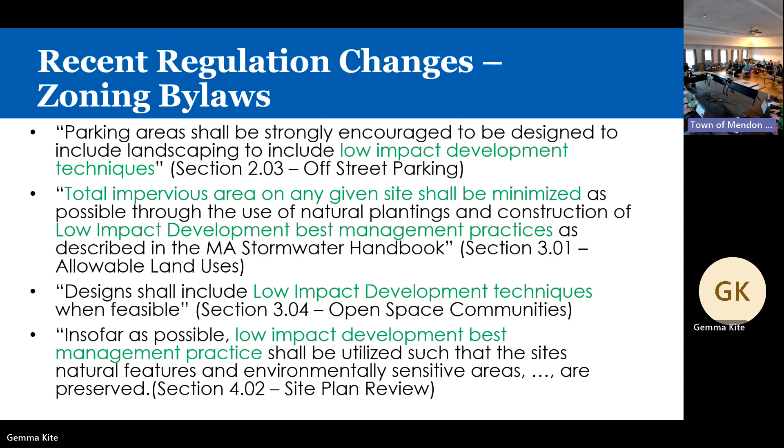But we also felt like people weren't using them enough. Change is difficult, and people like to do things the way they've always done it. So we thought that maybe a demonstration project would help.

So this is what this campus originally looked like. And around 2020, we built a new police station and adaptively reused the old fire station, and it was a great project and looked wonderful.

But the rest of it was just asphalt and parking. It was very hot in the summertime, had a heat island effect, and it did not drain well. Chemicals collected from the road and washed down into the parking lot, and the town well is right under the parking lot, which is not so great. We're going to move it to the edge, but clean water is really important for wells and drinking water, in Mendon and probably your towns too.

Anyways, we figured this would be a good area to show low impact development techniques. It was dug up anyways, and we wanted to do something, but we definitely needed experts—we did not know how to design a site like that. So we applied twice to MVP to get a grant, and we actually got funding from SNEP, the Southeast New England Program, which gave us money so we could pay Horsley Witten to do the technical aspects of the grant, and that was super helpful.

So the second time we got the grant to design the site, and then the town paid for the construction. An aspect of this project had to be educational, so there will be signs, and people can do a self-tour to learn about GSI and low impact development. There's also a website, if you haven't visited it, that has a lot of explanations on the site.

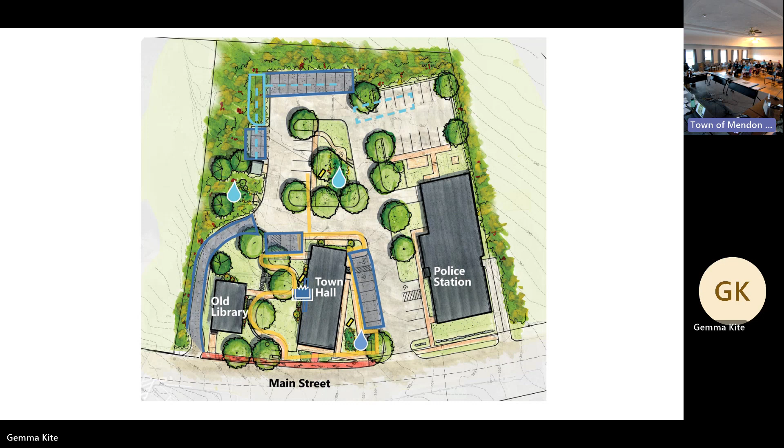And as Mike Maroli mentioned, we had a team that worked on it, meeting every two weeks, sometimes once a week, and the collaboration was really great. The fire chief would tell us if his equipment could get in and turn around, if the angles were right. The police chief made sure the traffic flow worked for having the police station here. Kathy from the Historic Commission made sure we were sensitive to the historical aspects of the site. So it was a real team effort.

And then—Hillary, do you want to say a little bit about MVP? Let's see. It's not answering—yeah, it won't go. There we go. Sure.

So the MVP program started back in 2016 under Governor Baker. Governor Baker's administration put together this plan to help our municipalities consider the impacts of climate change. We're seeing hotter days and longer, more intense periods of rain, and funding was put in place to help start the conversation with our planning grants, and to provide action grants so that the discussions and actions municipalities came up with could be funded through further grants.

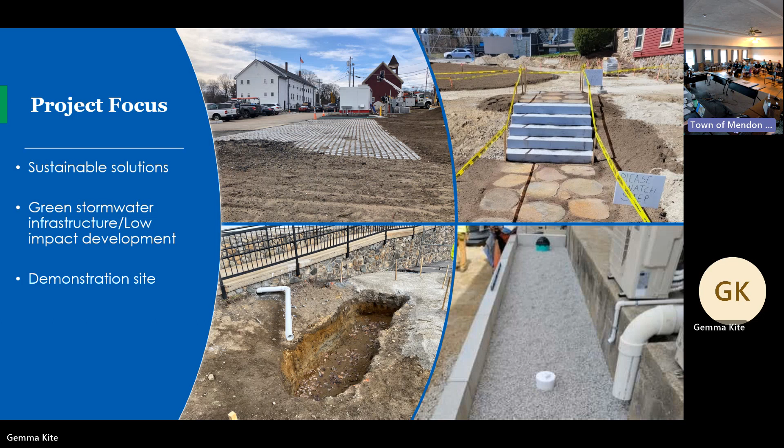Again, super informal here. So I'm going to talk about what GSI is, give an overview of it, and then I'm going to hand over to my colleague, Eliza, who's going to talk us through what GSI practices we used here at the Mendon Town Hall.

So let's start from the beginning. What is stormwater? I'm sure most of you know what this is, but as a recap, it's precipitation flowing over the ground and not soaking into it. In more natural areas, including our forests and our wetlands, stormwater can soak into the ground. That's what it's supposed to do.

In urban and more developed areas where we've got a lot of impervious surfaces, things like streets, driveways, sidewalks, building roofs, stormwater can't penetrate through these hard surfaces. So instead, it flows over our roads, it flows over our driveways, it picks up things like sediment, bacteria, pollutants, and sometimes it gets put into infrastructure, and then it gets discharged at another point, usually into our waters, into a stream, into our river, into our oceans.

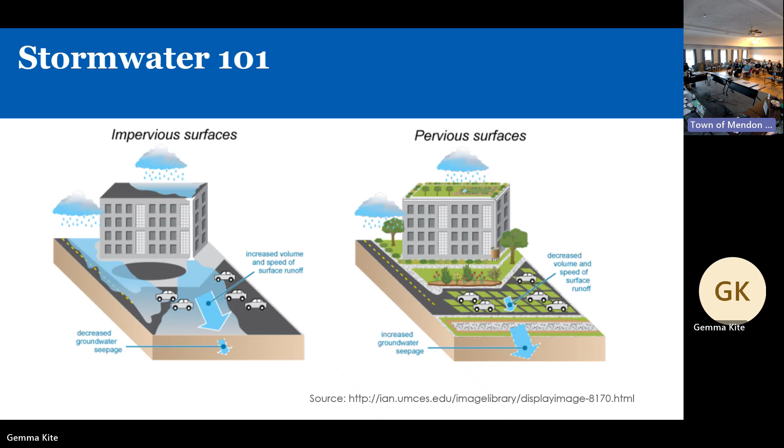So impervious surfaces, as this diagram might be a little hard to see, not only increase the amount of runoff that is coming off, but also increase the speed at which that stormwater flows. So urbanization affects the way water moves through our landscape. The more a watershed is developed, the more impervious surface we add to it, the more we are changing the way the watershed can manage the stormwater.

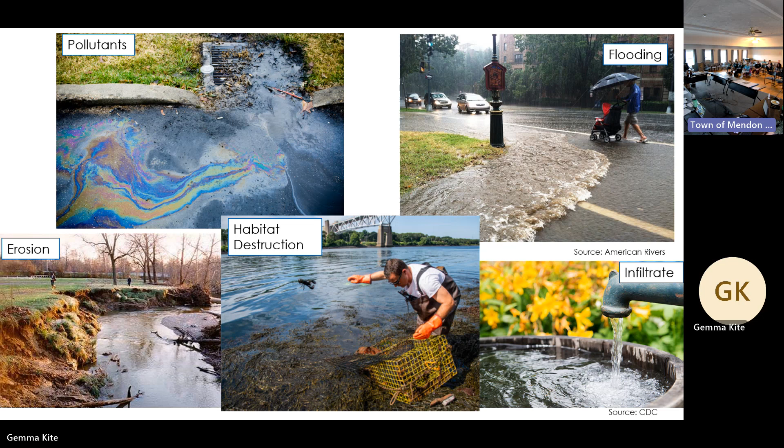And the result of this is things like increased pollutants to our waterways, an increase in the severity and frequency of flooding events, increase in erosion of our waterways and sometimes even our infrastructure on the roads, the displacement and destruction of habitat for fish and aquatic species. And less infiltration into the ground means we have a decreased amount of base flow for our streams. It also means less water is going into our aquifers that we use for drinking water sources.

So when you look at those, you might think, oh, these are all kind of not connected, they're seemingly isolated. But when you look at this on a watershed level scale, it can really cause and create havoc, and it can create impairments in our waters.

So Mendon is situated in the Blackstone River watershed. I'm sure most of you know that. Neighboring communities are also in this watershed. There is a tiny bit of Mendon that's in the Charles River watershed, so I don't want to ignore that, but the majority of Mendon is in the Blackstone River watershed. And in the draft Massachusetts 303D list, which lists our impaired waters as assessed by the state of Massachusetts, it has listed segments of Blackstone River as impaired for a variety of pollutants, including some of the headwater streams to the Blackstone River. So this is a real issue for Mendon and for the neighboring communities.

Stormwater is a tangible impact to our waters. We can manage it. We can manage it better at its source to help improve the water quality of our waters.

So how do we manage it? Traditionally, on the left, stormwater has been thought of as a waste product, something to quickly capture, get it off our roads, move it, transfer it somewhere else, and discharge it elsewhere. We use gray infrastructure, pipes, tunnels, catch basins, gutters, to capture this stormwater, move it, and discharge it. Well, there's been an evolution or revolution, however you'd like to call it, over the last few decades where we're seeing less gray infrastructure and moving to green infrastructure, which we call green stormwater infrastructure, GSI. GSI mimics natural processes, natural systems, to treat, filter, and infiltrate the stormwater at its source or as close to its source as possible.

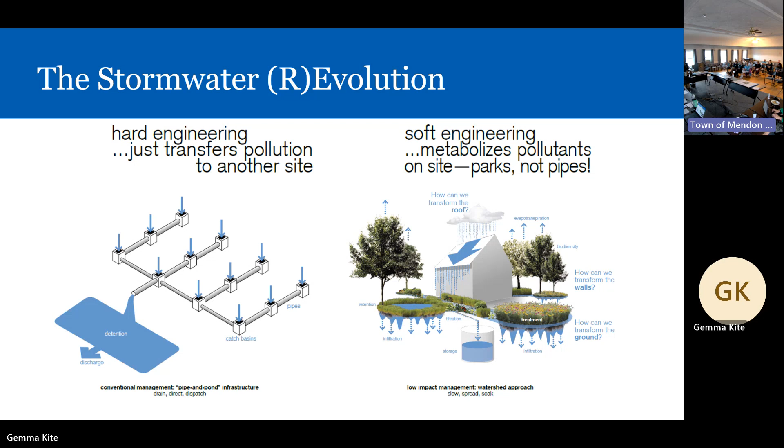I like this schematic, but I also really like the definition of GSI, pulled from the 2019 Water Infrastructure Improvement Act that Congress passed. It defines GSI as the range of measures that use plant or soil systems, permeable pavement or other permeable surfaces or substrates, stormwater harvest and reuse, or landscaping to store, infiltrate, or evapotranspirate stormwater and reduce flows to our sewer systems and or to surface waters. So it's a range of measures we can use collectively to help treat and infiltrate our water.

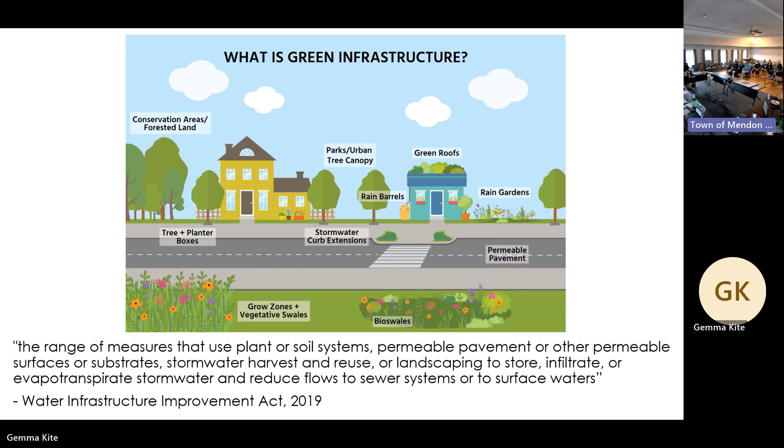This schematic shows a bit of a difference between our traditional gray infrastructure and green infrastructure. If you look at the left, the one thing we definitely want to do when designing stormwater control measures is slow the water down. Impervious surfaces increase that speed of flow, and we want to slow it down because that's what's causing erosion. So flow control is really important.

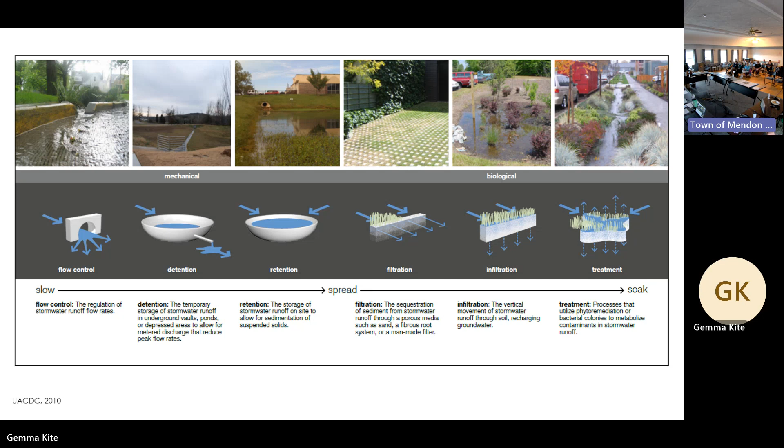We also want to spread it out. We want to detain it, again, to reduce our peak flows. On the left you've got more of the mechanical components of stormwater design and management, and as you move to the right we're getting more to the green aspects. Now GSI still includes those mechanical components, so we still include flow control, we're still detaining and retaining water. But with GSI, we're also adding that soak component, so we're using filtration, treatment, and infiltration.

So as a recap, the principles of GSI are to mimic nature, mimicking natural processes we see all around us. We're percolating water through the ground where sediment and bacteria can get trapped. We're using plant root systems to help uptake nutrients, and we're moving water through the ground and through transpiration of our plants.

We treat it as a resource. That's the biggest overall lesson here - whereas gray infrastructure treats it as a waste product, something to get rid of, we're looking at it as a resource. We want to infiltrate that water as much as possible to recharge our aquifers that we depend on for drinking water, and to recharge our stream base flows.

We can use GSI to capture water on site and store it - sometimes using a rainwater harvesting system where we capture it off the roof, store it in a cistern, and reuse that water later during dry periods to help irrigate the landscape on our sites. We'll get into some of the co-benefits, but the great thing about GSI is there's a lot of other benefits besides just stormwater management. And the last point here is it promotes healthier spaces for people, plants, and animals. I don't think anyone can argue with that.

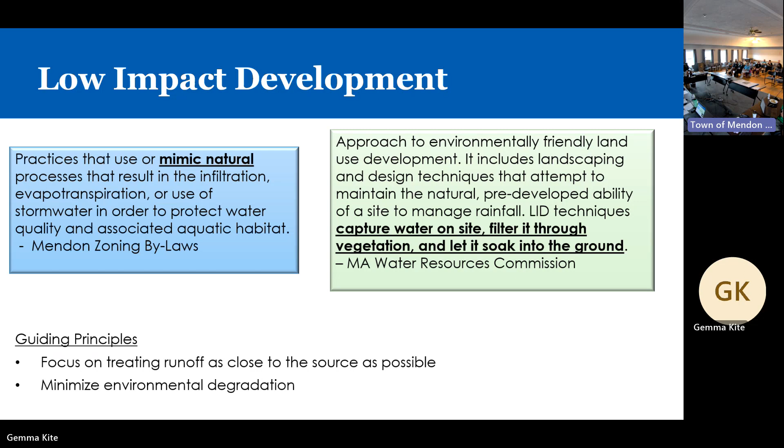So this is just to show that there are many different terms used for GSI. You might have heard not only green stormwater infrastructure, nature-based solutions, low impact development is another term used to define the same principle. In this case, Town of Mendon selected low impact development as the term to include in their bylaws. I just wanted to highlight that it's basically the same thing. In Mendon zoning bylaws, they define low impact development as practices that use or mimic natural processes. So again, talking about the same thing here.

So let's get into those benefits. A couple slides ago, I mentioned there's a lot of great co-benefits of doing GSI. We've already talked a little bit about the water quality, so I'll move past that and talk about energy. Less pavement means less heat. One of the principles of GSI is taking away as much impervious cover as possible, replacing it with things like landscaping or porous surfaces, pervious pavement and pervious pavers. Hard surfaces, impervious cover tends to trap and store heat so that it feels a lot hotter than it actually is.

By replacing some of that impervious cover with landscaped areas, we can really reduce that heat island effect. And if we're planting trees, not only do those trees provide shade for people and animals underneath them, but also if you plant them near a building, it also helps to shade the building. So less heat trapped in and around the building obviously means less energy costs to cool that building during the summertime. And of course, more plants mean better air quality. Plants do help clean the air, so that's always a good thing as well.

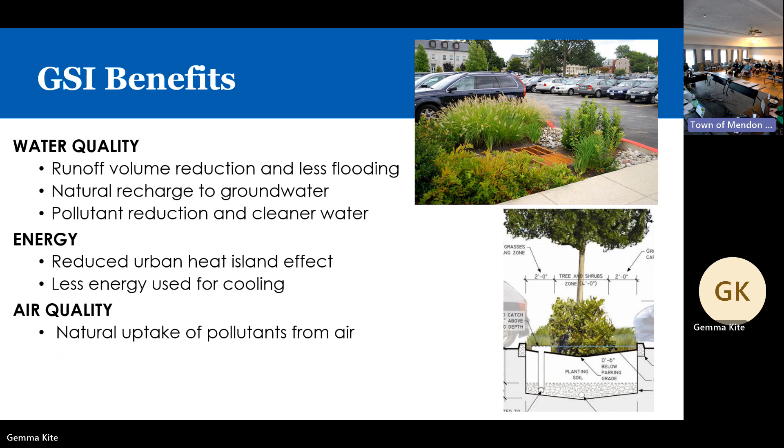One of my favorite benefits to talk about is community and habitat. Again, GSI, we think green, we think plants. And if you plant them correctly, which we always try to encourage plantings of native plants and mixing in some pollinators, you're going to attract the bugs, the bees, the butterflies, the birds. You're going to really create a nice habitat for those critters to come to. And if you disperse GSI throughout the urban landscape, you're also creating a habitat corridor for those bugs and critters to go between.

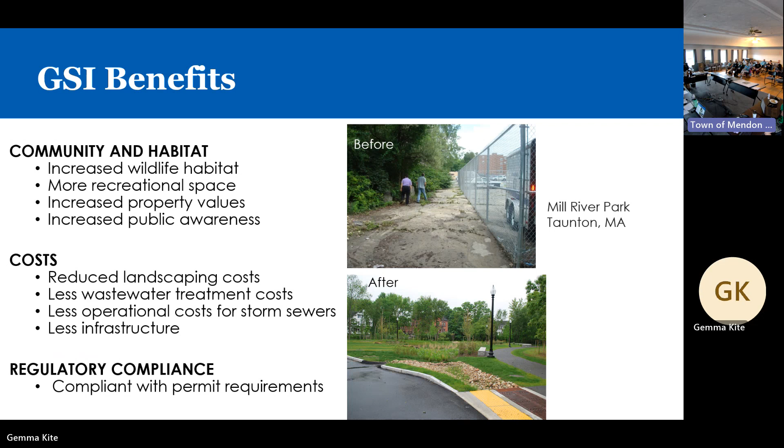For community, when you insert more GSI and landscaped areas, it's more open space for folks to recreate. And when people see more green space, they're more encouraged to get outside and be active and connect with other people in the outdoors. And being outdoors is not only good for our mental health, but our physical health as well.

And resilience. GSI practices are resilient to a changing climate. So where you have gray infrastructure, you have fixed pipes, you have fixed catch basins, right? When you design a gray infrastructure system, you design it so the pipe starts at this invert elevation and it ends at this one, and that's fixed. Sometimes it's even fixed in concrete.

With green infrastructure, it can adapt. These are intended to be able to be a little bit more flexible with a changing climate. And sometimes we design GSI to assist with a changing climate. For example, we have a site in Harwich where we are helping to redesign a boat ramp parking lot. And the parking lot is a very low-lying gravel parking area that is just prone to inundation from the tide and some high tide flooding events.

So what we're going to add to the design for the parking spaces is these pervious pavers that are going to add some structure to the parking area. So when there are those high tidal events, when there is that flooding, it can be a little bit more stabilized.

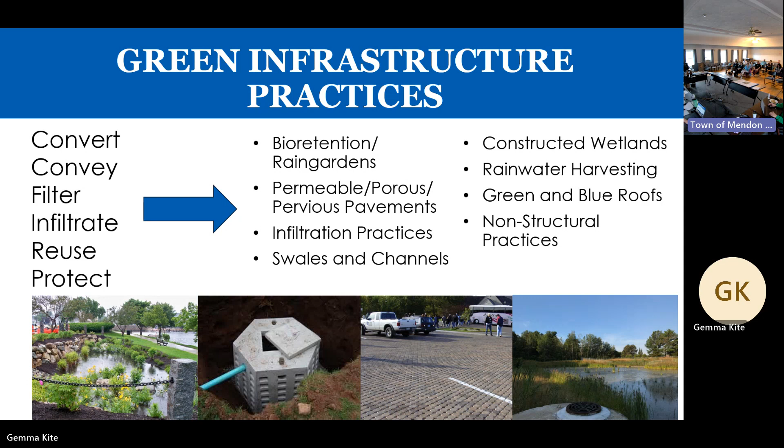I'm going to talk about what we did specifically at this site. If anybody has questions, please stop and ask them. We'll also talk about them outside, but if anything's unclear, do stop and ask me, because I've spent a lot of time with this, but it's not as familiar maybe to all of you.

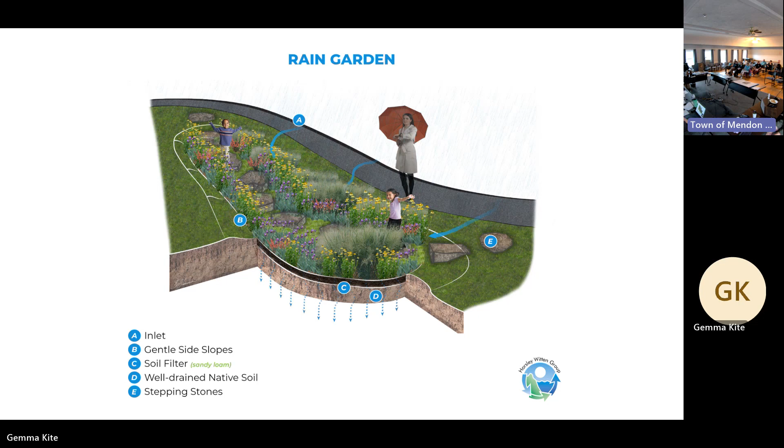So during a storm, this fills up. If there's more water than it can handle, it will overflow across the surface. And then after the storm, it infiltrates, soaks into the ground. So this is pretty straightforward. These can be done at very small scales, like individual homes. That's often something people like to do. So that's the starting point of these filtration systems.

If you're in a more urban site or you don't have as much space, you may need to put what we call hard edge bioretention, which has curbs or other walls. It just gives you a little more space without having to grade out a slope. You get more volume and less square footage.

The water goes into a sediment forebay area, which allows the sediment and other materials, leaves, trash, etc., to drop out. That's really important because, as we'll talk about with maintenance, this allows for easier maintenance. You don't end up with things in your plants that you have to pick through. It's all just concentrated in one spot, so in theory, it's just a shovel, and you can take things out easily at the one point.

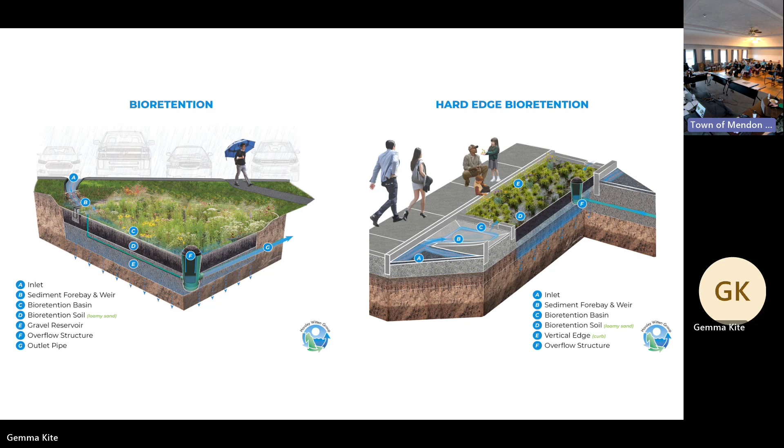And there's also, this is optional, and we have some of the bios on this site have it, and some of them don't, but we have an under drain pipe here, which can allow for additional water to get out of the system if you have bad soils underneath, or if, for some other reason, like you have a drinking water well like we do here, you can't infiltrate under the system, you can put in a pipe to convey the water out of the system.

So then, this is kind of unique to this site. This is something we don't often use, but this site was a great opportunity to use it. It's basically a hard edge bioretention, but in a smaller area, in a planter box. It functions the same way. You have an inlet, and in this case, often for these planter boxes, it's a downspout or something similar.

And you've got similar plants. You have filtration soil, you have filtration stone. The one big difference about this system is that it doesn't have a sediment forebay, because the water's coming from a roof or another surface that isn't generating as much sediment or pollutants. Also, it has an overflow, you'll see this all outside. It's the same principles, just a slightly different configuration.

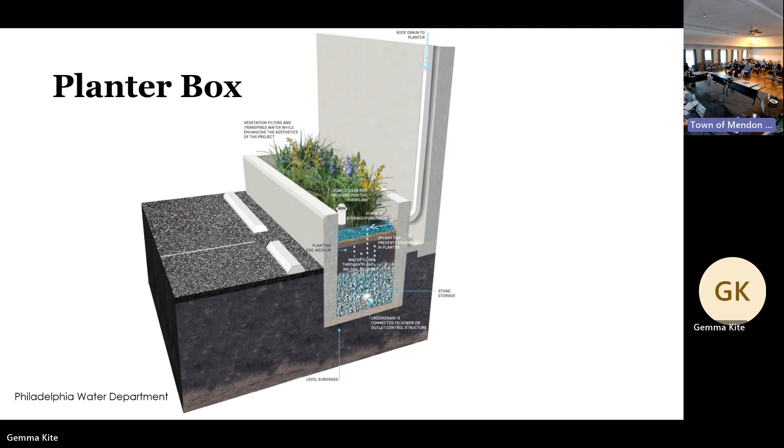So why would you use this type of practice? The really great thing is you don't have to compromise anything on your site in terms of site function or use. You need to have a parking lot, you can still have a parking lot. You need to have sidewalks, you can still have sidewalks. But the benefit of it is that it infiltrates water, so you can reduce the amount of runoff coming off the site. It can't take everything from every storm. In larger storms, there will still be runoff, so often we combine a pervious pavement with something like a bioretention area or other stormwater practices.

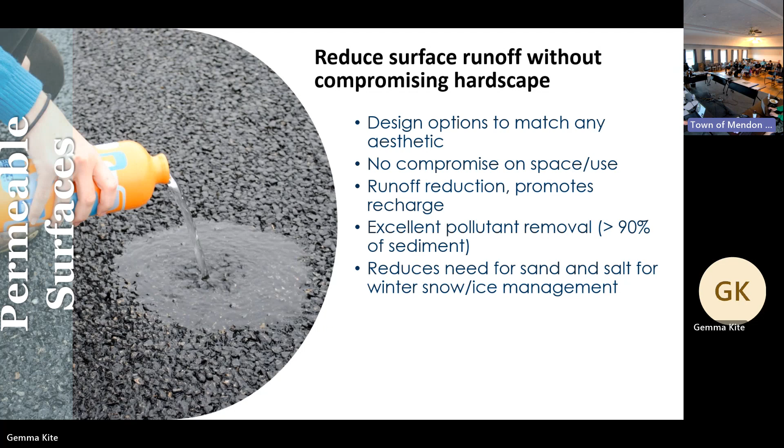There are a number of different types of materials that you can use. There's pavement and concrete that look very similar to typical pavement concrete, and then there are lots of paver systems, different proprietary materials, so you can find one that fits the use and the aesthetics of your site. They all work in the same manner. They have a layer that allows water to infiltrate, and then various sand and stone layers underneath that filter. Again, you can put in an under drain, you don't have to, it depends on the site.

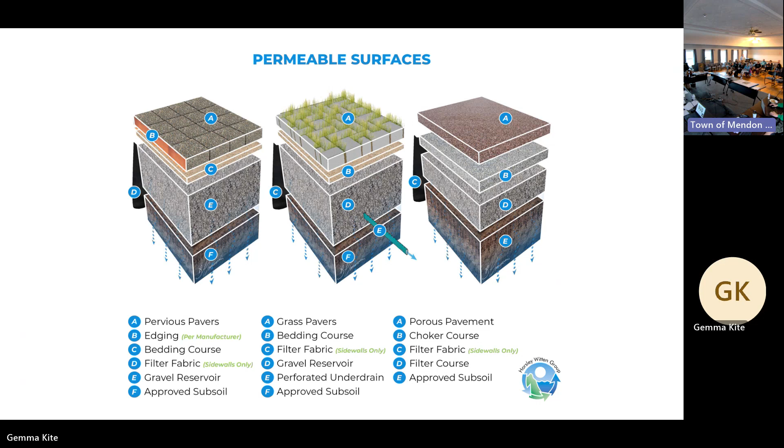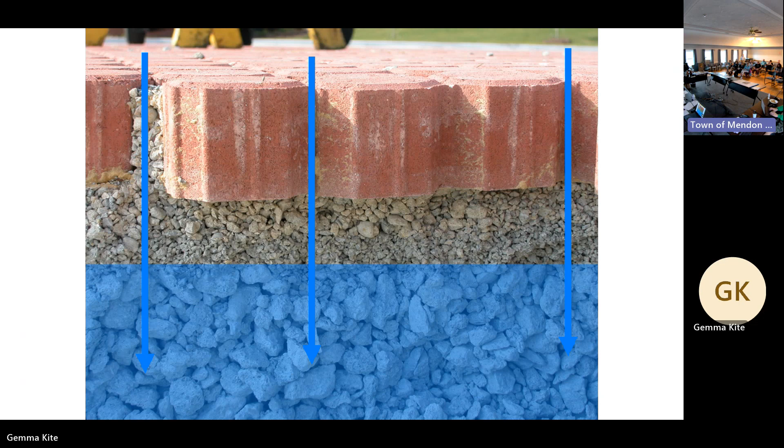So the function is pretty basic. It infiltrates, it fills up, and then it outlets. You do need an outlet somewhere in the site.

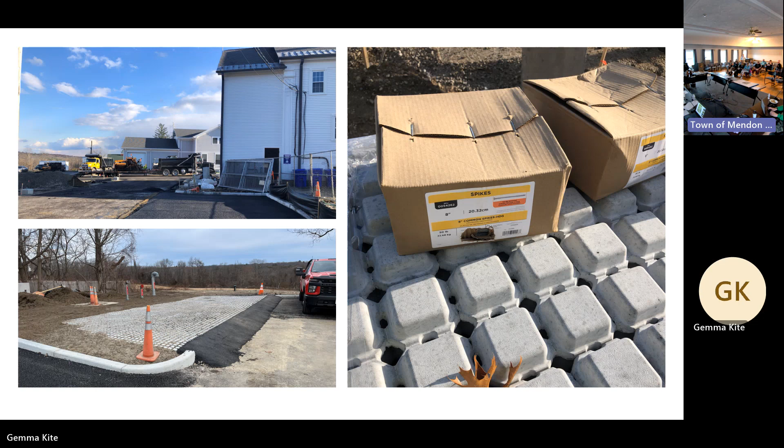And then the last thing I wanted to talk about was kind of a sneaky third green infrastructure practice that often gets forgotten because it's not as cool looking, and people may not even realize it unless you are the one designing the site. But removing pavement can be a really effective tool.

So this can be a really good tool, and this is something that we would encourage you to encourage - just seeing if you can add more green space to the site, get it more organized. You don't need a big parking lot if it's not being used, that kind of thing. So yeah, those are the practices we used on this site.

Yeah, go ahead, I just had a question. Was the decision not to make the entire site pervious where there's pavement cost-related?

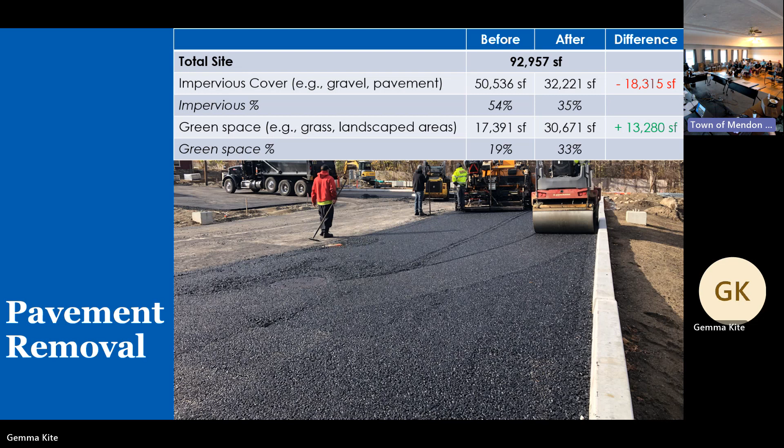So pervious pavement, it's not wearing exactly, but we often like to keep the drive aisles where there's more traffic impervious, because they will get clogged. If these drive aisles would get clogged sooner, so by just having the parking spaces pervious, it will last longer.

I don't know if cost factored into that, but usually having the parking spaces themselves pervious is a little easier than having the entire site pervious.

What is the project cost for this, and then the time from concept to actual implementation of all these different measures? You almost got the cost information.

Yes, and the timeline too. It's a quick timeline. So the construction cost was about just under 800K. And then the planning level costs were just over $100,000 to design, from planning, permitting, design phase, all of that, to preparing the bid package and going out to bid.

The town went through the MVP process in 2018. And in 2019, we wrote the action grant for the design phase. And then construction started in August of 2022. How much of that was covered by an MVP grant?

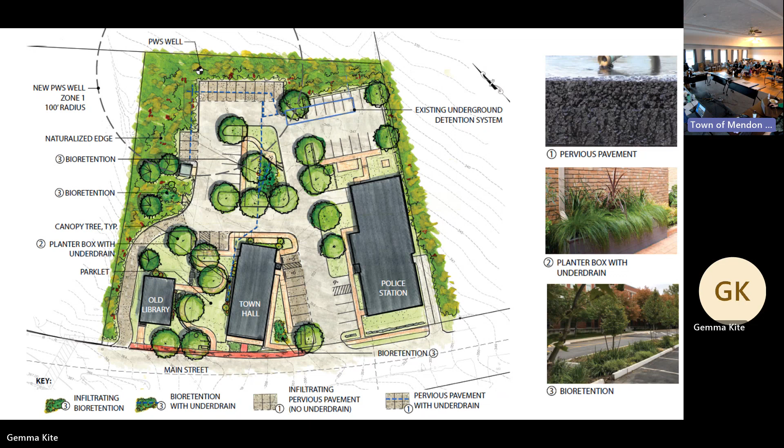Go ahead. I mean, the MVP grant does also - construction costs are also eligible for MVP funding. There is a 25% match requirement, which can be done with in-kind work from municipality, volunteers, community members, or cost match. It can be matching federal funds, local funds, private funds, anything but state funds.

Go ahead. How does that construction cost compare to a traditional non-GI approach?

Depends. In this case, it may have been more expensive. We were trying to do more of a demonstration project, and we had some grant funding. It can be less expensive. Porous or permeable pavement is the same as regular pavement, but you typically put a bigger subbase on it to store the water, so that adds cost. But if you eliminate something else, then it's kind of a wash. So it kind of depends really on the constraints. And it's a great segue.

Let me talk about a couple things. Again, my name is Rich Claytor, Principal at Horsley Witten Group. I'm just going to have a couple of slides on whether we can do this sort of thing everywhere, at any particular site. And the answer is, well, yes, but it doesn't just happen.

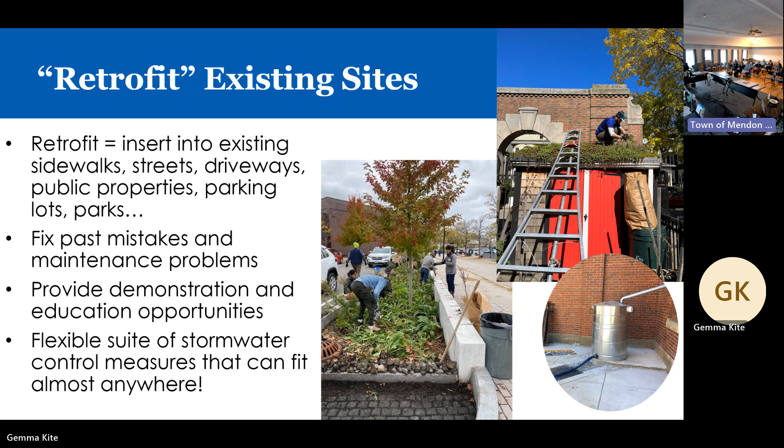Next steps for the community? Yes. Oh, already, okay. Sorry, I just threw that on. All right, let's see. So, I guess you can do the next slide. Sure.

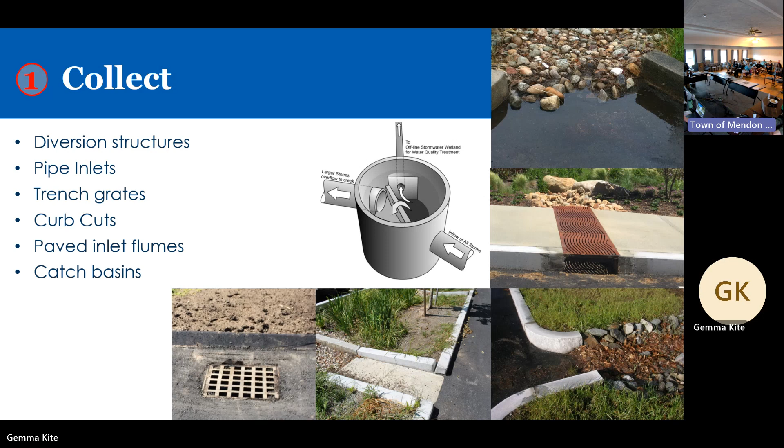When you look at capturing, this is where we're capturing sediment and separating out some of the initial pollutants. Good design in the beginning means less work later. We've learned over the years that a sediment forebay, a place for sediment to settle out when the water slows, should be easy to maintain. We'll go outside and see this, but if you put in large river rock, you're going to have to scoop out around it, which can become a big pain. It might not look as nice to put in a pervious pavement panel like you see on the top right, but it's much easier to scoop out the sediment after it gets to a certain depth. Again, twice a year and after every major rain event is the rule of thumb.

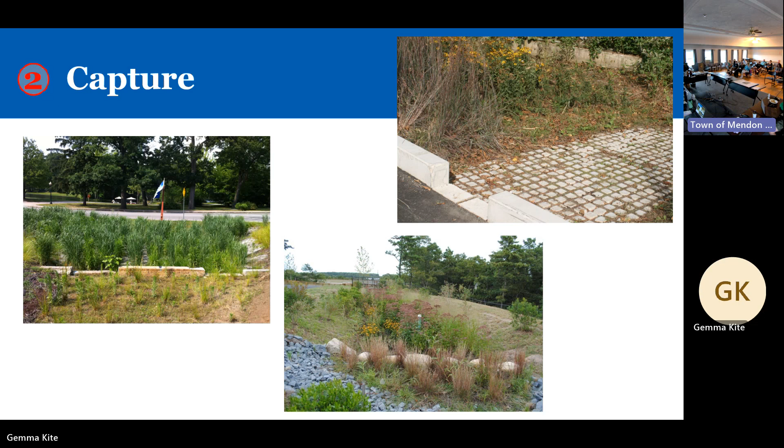Once you've cleaned out some of the sediment, you can continue to move the water where you want it on site. In maintenance here, you're looking periodically to see that sediment hasn't made it past your capture system into these swales. If it has, remove it early and figure out why the sediment got past. The other thing to look at after major rain events is erosion. If you're using vegetated swales or non-hard systems, make sure there's no areas that have eroded, especially in the initial years of plant growth and establishment.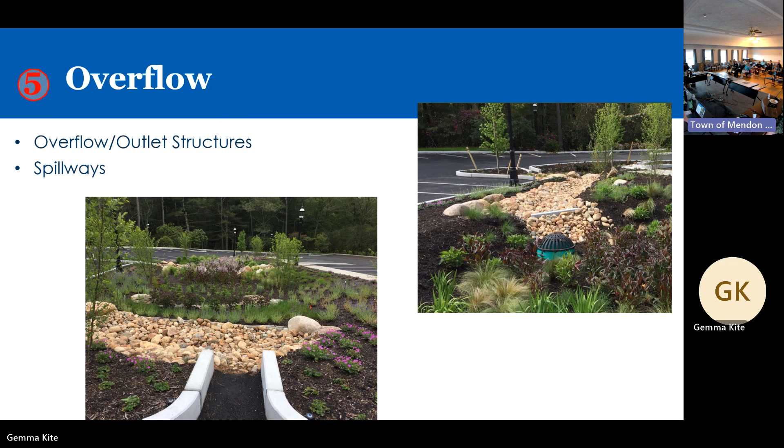So if you boil this down: have a plan, which is a maintenance schedule, two times a year with occasional reviews later on or after rain events. Sweep. You want to follow the water upstream and downstream, make sure it's collecting properly, make sure it's not getting stuck anywhere, and make sure it's going the place it's supposed to go. And make sure you've collected that sediment, because sediment is the enemy.

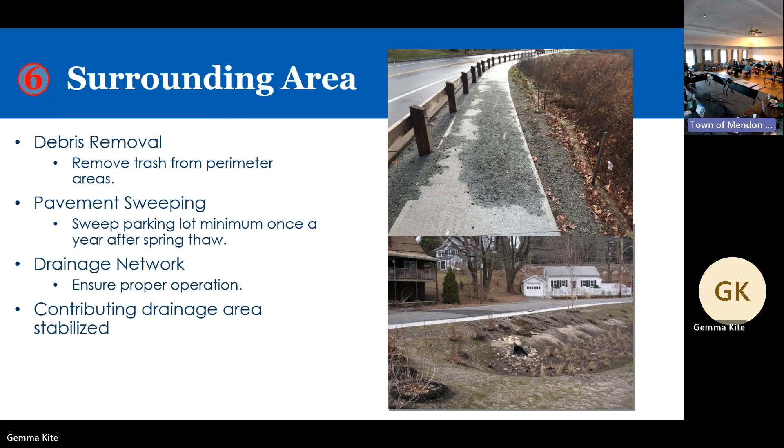Weeding, if you do some weeding early on and do it twice a year, you'll have a much easier time getting native plants to establish themselves. A good maintenance schedule should include a visual guide to weeds for anyone doing the work, and there should be a connection where if a person has a question about whether a plant is supposed to be there or not, they have a place to call and ask, so you don't end up pulling all your native plantings on accident one day.

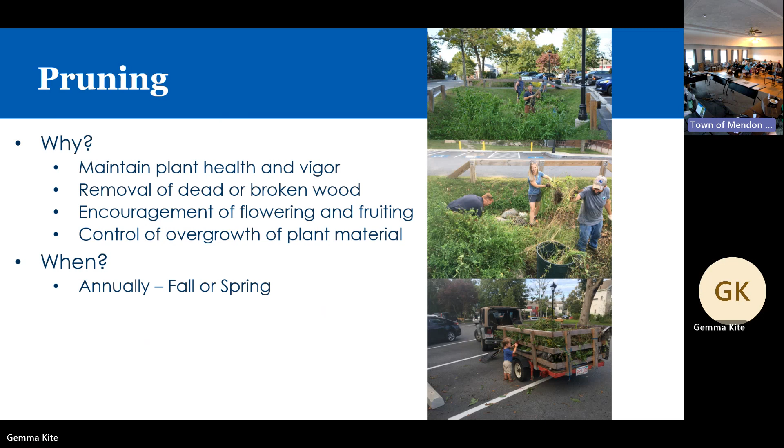Finally, fertilizing, and this is me on a soapbox for a second. Don't fertilize, with one caveat: when you're first installing your system, have your soil tested to see if there are any nutrient deficiencies, and fix those. If you plant a lot of shrubs and herbaceous perennials, it might be okay at initial planting to use a low number fertilizer, like a 5-5-5 NPK, nothing more.

Most bioretention, rain garden, and other species used in these systems are actually designed for low nutrient soils. So if you put in really rich soil and hit it with 20-20 fertilizer, you're actually making those plants weaker and making it easier for invasive species to grow, because they take advantage of those nutrients. Whereas in a nutrient-starved system, these plants do well and weeds don't.

And finally, Rich is going to finish this off. One thing about green infrastructure that separates it from gray infrastructure is it's on the surface, it's in your face, so you can generally see when it needs maintenance. If you don't maintain it twice a year, it'll tell you - it may start clogging, ponding water, weeds may take over. So one of the things we stress in designing these is to design with maintenance in mind and talk to the client about maintenance.

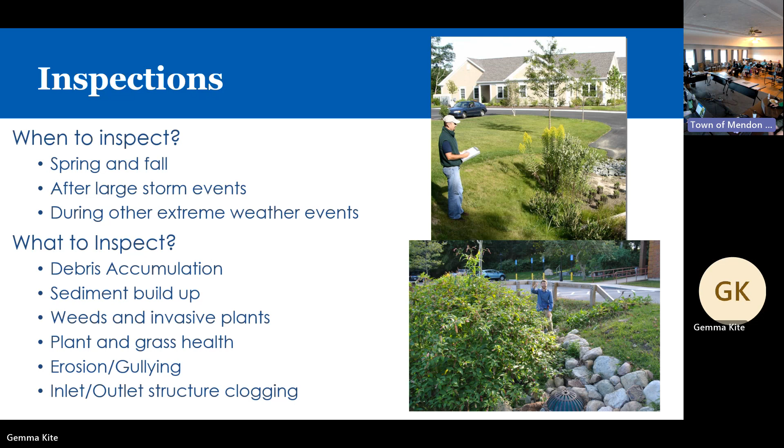Inspections - we've provided the town with a maintenance manual that shows the weeds, the frequency, and what you're supposed to look for when maintaining this, and when to do it. Importantly, a plan that shows these five elements - the inflow, the collection, whatever - shown on a plan, lists exactly what you're supposed to do. So you know where to look, what you're supposed to be doing, and what the activity is. This is where the sediment is collected, this is where we should be removing it.

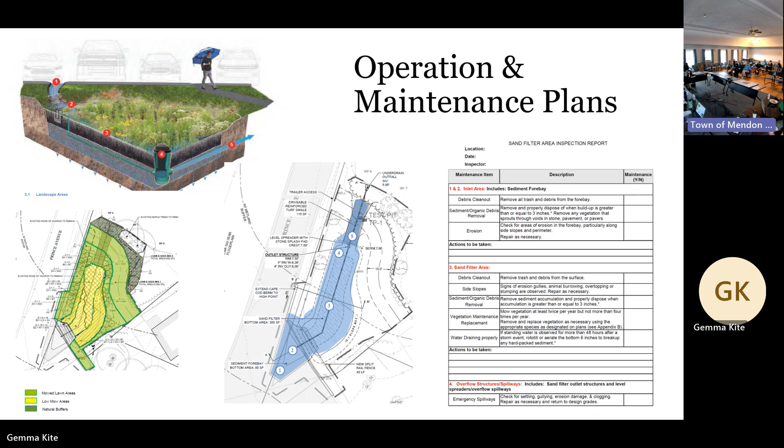We certainly have plenty of time in the field to answer more questions, but go ahead. Based on the pervious pavement, a lot of pushback that we get from developers is it's cost prohibitive, and it doesn't really make sense because of the maintenance. The pores get clogged up with sand during winter, that type of thing. As the technology advances, that's not so much an issue, and the cost is more at parity with traditional impervious pavement.

I guess what's your reaction to that? Yeah, so it's a good question. You can argue that the capital costs of porous pavement might be a little higher than traditional, but if you look at all of the costs—if you can do both your paving and your stormwater in the same location, or a lot of your stormwater, and you don't have to do a bunch of underground chambers somewhere else, it can be very expensive. They're out of sight, out of mind too. They tend not to get maintained regularly, or a big detention pond somewhere else. You could line up your costs, and it gets to the point that we heard earlier: why didn't we put porous pavement on the whole site?

We generally don't do it in high traffic areas because it clogs faster. So to keep it working, the maintenance has to be a lot more frequent. So do it smartly. We'll show you today, we have essentially a pavers system for the fire department to access their cistern. It'll rarely get traveled on, and that should require almost no maintenance or sweeping. And then we've located a lot of our porous pavement in the parking stalls, not in the main travel lanes, because turning movements tend to mush the pavement and clog the pores. You do have to maintain them, you'd have to sweep them—contract to sweep them periodically, removing the sediment or the sand, just like anything.